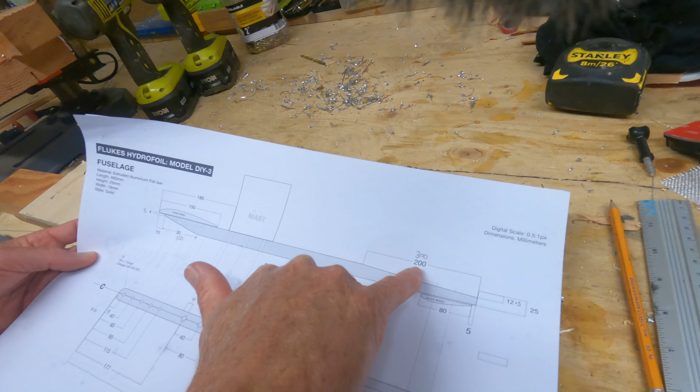Instead of 92 millimeters, I've gone to 120 millimeters. Instead of 4, I've gone to 5. And instead of 12, I've gone to 12.5. So let me just quickly show you what that looks like on the aluminium. So first off, what you do is lay the aluminium out like it's looking the same as the plan. So we've got the top up here, and then we can basically draw out these dimensions.

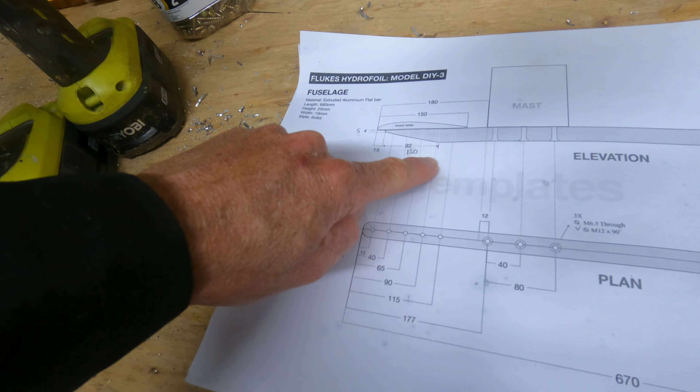So I'm coming down 5 and across 120. So down 5 from the top, do a mark. You can see I've already drawn this line, but I'm just showing you how to mark it out. And then across 120, and then literally just draw a line, and all we're doing is just getting it ready to actually build the jig. And then I like to just mark it so you know, okay, that's the waste. So that's what we're actually cutting off.

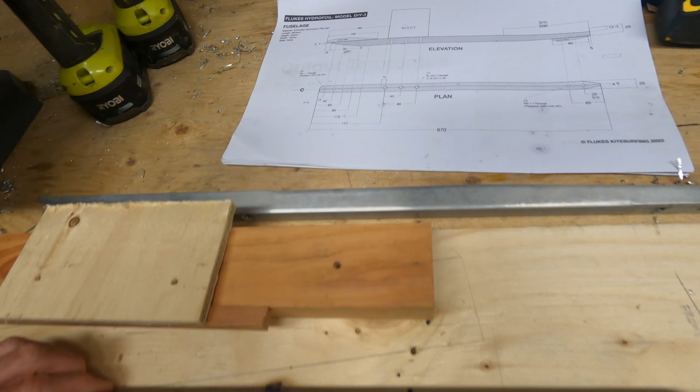Then at the back, we do exactly the same thing. So we've got 12.5 millimeters down, which is half, and 300 in. So 12.5, 300, and then again, just connect those dots. Like that. And that will be the shape that we're going to take. And you can see I think that that's a better shape for this amount of thickness.

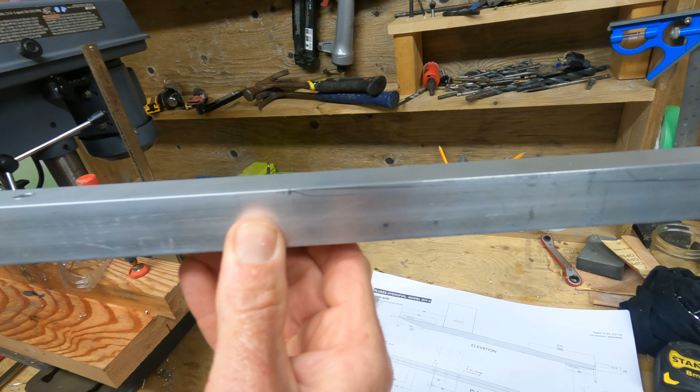There's so much strength in this aluminium 1 inch by 1 inch that should take a bit of the weight out for us. The final cuts are actually off the tail. So right here we're going to slim out the tail to allow the water basically to produce less drag in the back. And I've made a change there too. We're going to 9 millimeters across the back there and up to 50 instead of 35.

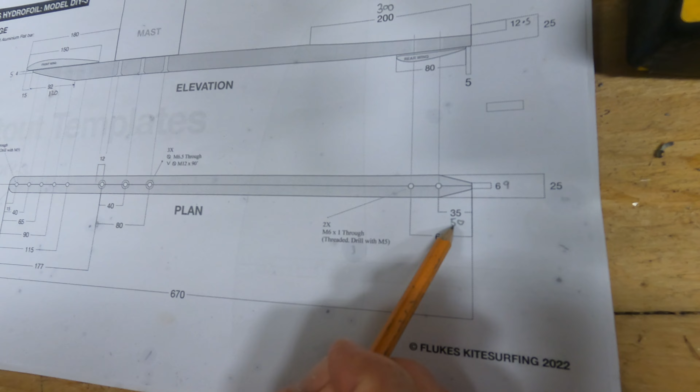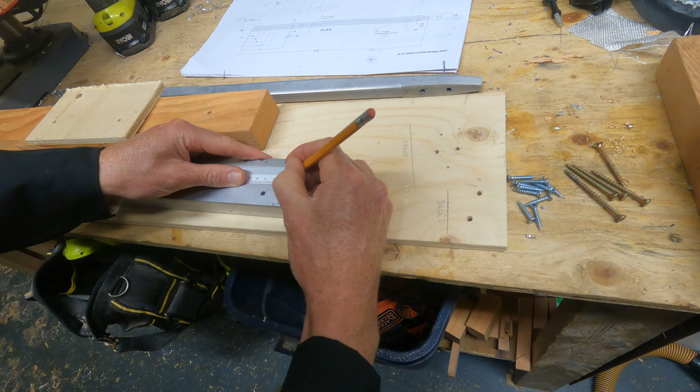So if we look at this, what we need to do here is actually mark the center. So 12.5, and then come either side of that, 4.5, there and there, like that. And we can slim that out more at the end, but I'll show you why I've moved that to 9. Come up to 50, and come up to 50. And then you connect those two dots.

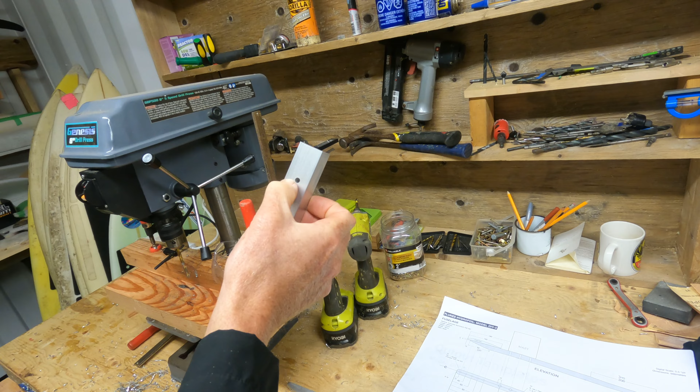So the idea here was to leave enough thickness on either side of the connection hole. So that's why I've made that a bit wider at the back and just slimmed it out a little more. So now that we've drawn the lines that we need, we basically use them in order to create the jig. So it's a really simple jig for the table saw.

Before I talk about that, there are other ways that you could cut this. You could cut this with a bandsaw. You could even machine it down with a router. You know, if you're feeling really energetic, you could even do it with a hacksaw. But I choose to use the table saw for this. I find that that's definitely the easiest and the fastest, but you could definitely have a look at some other ways to cut aluminium, and you could choose any to actually do this.

So to build the jig, I start by getting a parallel piece of plywood. So it's at 180 millimeters, and it's just a rectangle.

And then I just use my eye to line up, if you have a look down here, line up that point and that point on the edges of the plywood. And then when we're cutting, we'll actually run the saw. The saw will be set to cut right down along the side of this ply. So this will be our reference, and the aluminium will literally be sitting over like that.

So once you've lined that up, and you can just use your eye for this, it doesn't need to be absolutely perfect, because if it's 120 mils back, or 124 mils back, or 118 mils back, it's not going to matter. This is just a number that I've picked just to make it look good and be sort of hydrodynamic. But if it's slightly out, it won't matter. So just do your best to line that up with your eye.

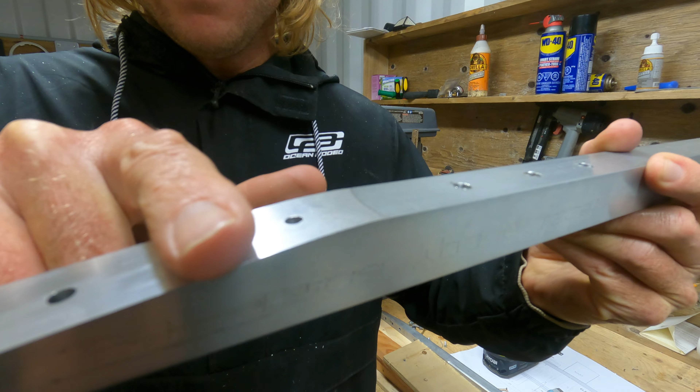Okay, so that's all done, and now we're finished with the primary shaping of the fuselage. Just blended the corners in. It's pretty much all nice and smooth everywhere. All feels pretty good. And you know, there's some final sanding that we'll do in the later stages, but for now, we're finished with the shaping and we're going to move on to threading all of our holes.